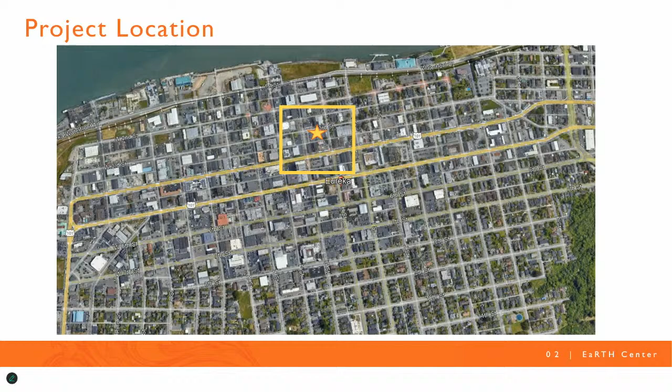Here's a bird's eye view of the project location. Looking closer, the project is located between G and H Streets on the south side of 3rd Street.

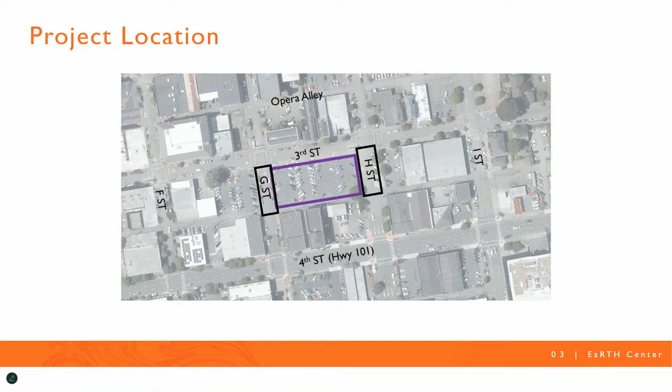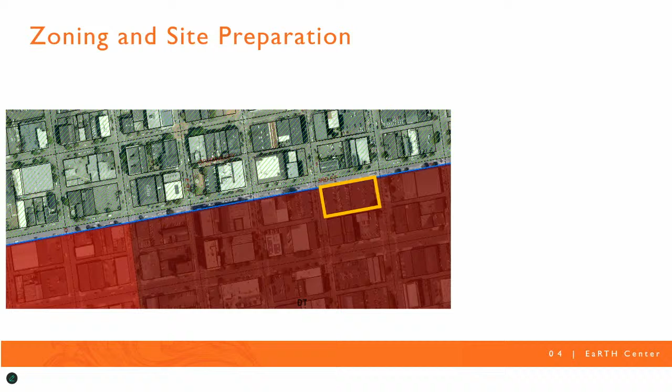The site is located in the downtown, or DT zone, where all the proposed uses, including government facilities, which will be HTA's bottom floor project, residences, restaurants, offices, and retail are all principally permitted. The site is just south of the coastal zone, shown as the hatched green area, and the Old Town National Historic District, and 3 blocks south of the city's northern waterfront on Humboldt Bay.

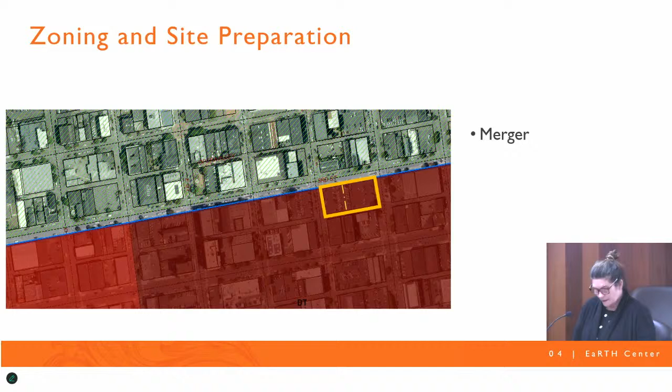The flat rectangular project site is currently 2 parcels used for public parking and is improved with asphalt paving, concrete curbing, limited landscaping planters, and parking meters. The City of Eureka, as the property owner, has completed a merger of the 2 parcels on January 3rd, 2025.

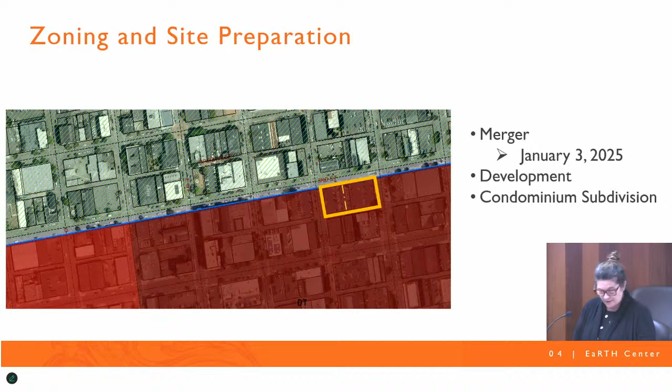Following development, the city will complete a condominium subdivision to separate the ownership of the housing on the upper floors, which will be transferred to Danco, from the ground floor transit center and commercial spaces, which will be transferred to HTA.

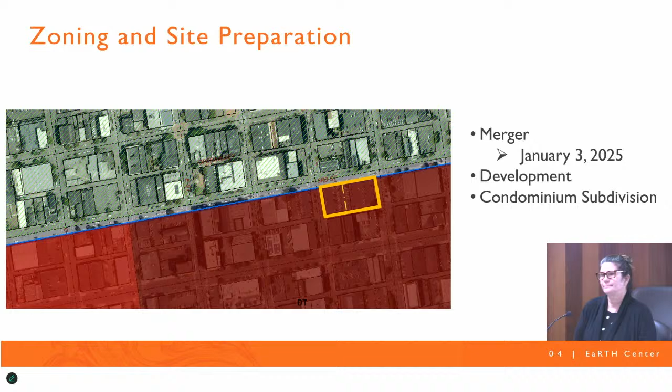On November 16th, 2021, Eureka City Council entered into a Memorandum of Understanding, or MOU, with HTA to collaborate on the development of the EaRTH Center. On February 1st, 2022, Council declared the project site exempt from Surplus Land Act regulations, and on March 1st, 2022, Council authorized the reduction of public parking from the Parking Assessment District.

HTA was awarded a California State Transportation Agency 2022 Transit and Intercity Rail Capital Program grant with up to $10 million for the construction of the ground floor intermodal transit center.

On May 1st, 2024, HTA's board adopted a resolution conditionally approving Danco as the developer for the EaRTH Center project. Finally, on June 4th, 2024, Eureka City Council authorized the city manager to enter into a development and disposition agreement, or DDA, with HTA for the EaRTH Center development, and also found the project categorically and statutorily exempt from the California Environmental Quality Act, or CEQA, by adopting City Council Resolution number 2024-25.

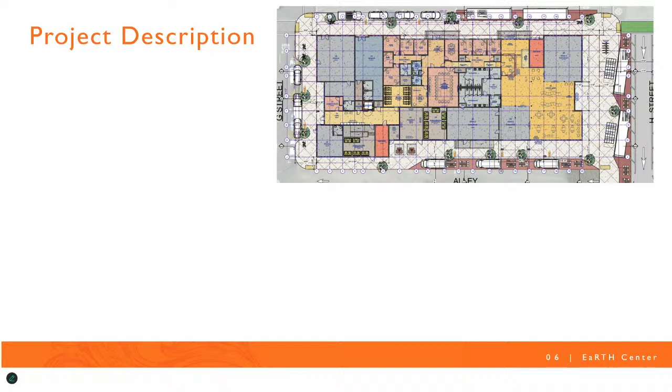The EaRTH Center will be a 4-story mixed-use building having a 19,400 square foot footprint and a total floor area of 75,701 square feet.

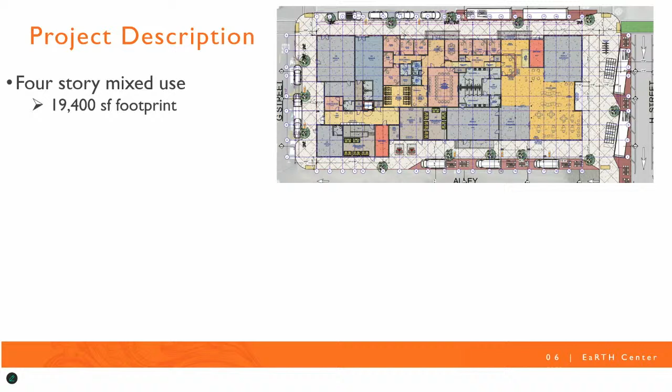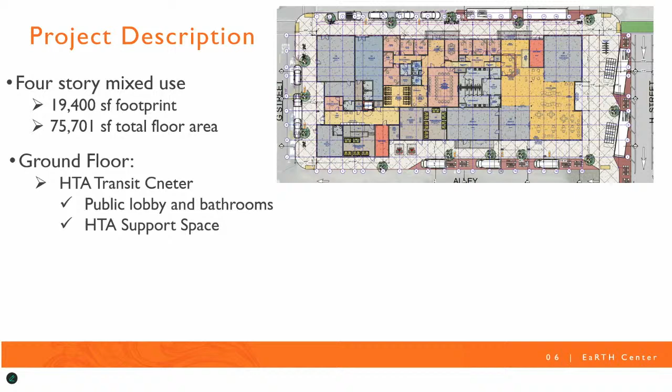The primary ground floor tenant of the EaRTH Center will be HTA Regional Transportation Center, or the Transit Center, which includes a public lobby and bathrooms, offices and support space for HTA, including a conference room, staff lounge, and staff restrooms. There will be 5 leasable tenant spaces.

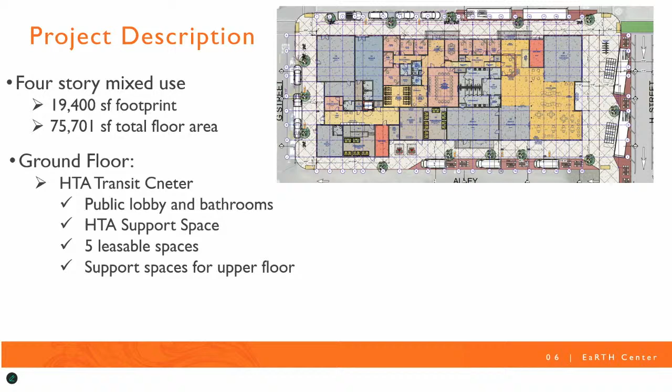That's approximately 11,000 square feet for future commercial uses such as a cafe and retail shops. And finally, ground floor space supporting the upper floor housing, including a lobby with mailboxes, a manager's office, and a bicycle storage room.

The second through fourth floors, and here I'm showing the second floor, will have a total of 46 residential dwelling units consisting of 3 studio apartments, 18 one-bedroom, 13 two-bedroom, and 12 three-bedroom units.

The second floor will contain residential common areas and amenities, including a community room with kitchen, a fitness room, and a 2,613 square foot outdoor terrace with playground.

In addition, each floor will contain laundry facilities, and 2 floors, the third and fourth floor, will contain long-term bicycle storage for the tenants.

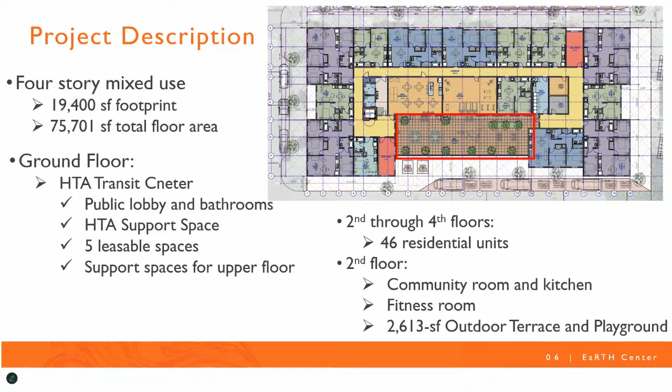The transit center is intended to integrate local and intercity bus service with car share, ride share, bike share, bicycle, and pedestrian travel. To that end, the development will provide various improvements, including expanding sidewalks and new bus shelters along H Street.

New charging stations for buses along the alley, and new electrical vehicle charging stations along G and 3rd Streets.

There will also be a major reconfiguration of H Street between 3rd and 4th Streets. The west lane, where the bus shelter currently is located, will become a bus-only lane. And a new bike lane will run on the eastern side of the street.

The current street parking configuration on the east side of H Street between 3rd Street and the alley will change from angled to parallel, which will cause the street to be reduced to 1 lane in this section. However, on H Street between the alley and 4th Street, there will be no street parking, allowing 2 lanes for vehicle travel.

Under state density bonus law, housing development projects that propose 5 or more units and include affordable housing are allowed to exceed the local jurisdiction's max density limits and deviate from other development standards and zoning code requirements in exchange for below market rate rents.

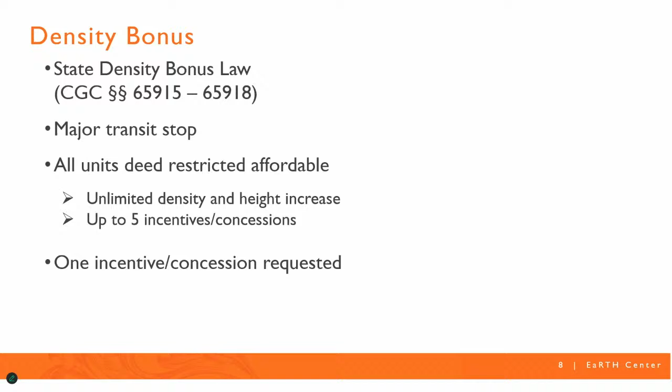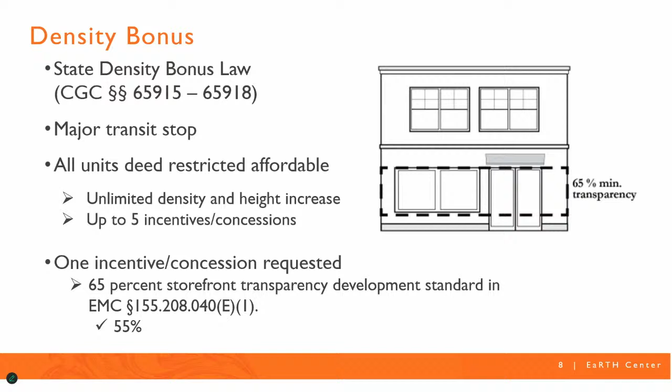The goal of design review is to make sure that the new development meets objective design review standards, particularly for street-facing facades. This helps ensure that the buildings are well articulated and visually interesting, contributing to the overall character of the area in Eureka.

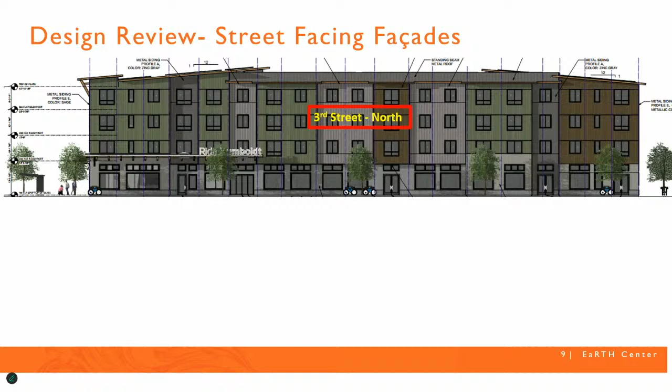Eureka Municipal Code design standards require that new buildings incorporate at least 2 architectural features from a list of 15 features, and that the facades do not have blank wall areas greater than 10 feet by 10 feet square. Tonight we'll be looking at 3 street-facing facades: the first is 3rd Street, then G Street, and finally H Street. The 3 street-facing facades meet the following 3 of the 15 architectural features: roof form variation, horizontal articulation, and cladding materials facade.

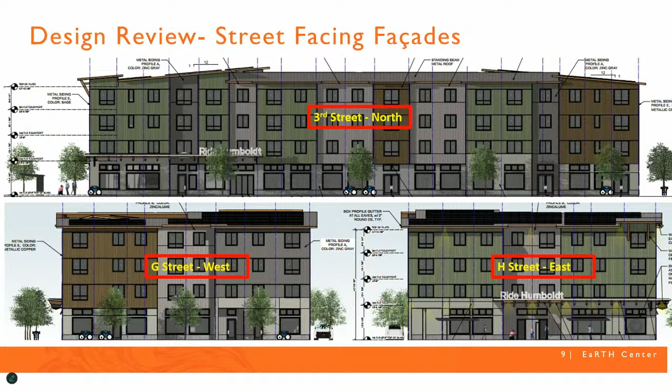Roof form variation: the 3rd Street elevation has 35% roof form variation, the G Street elevation has 29%, and the H Street elevation has 36%, when the standard is 25%. The roof also has wooden eaves, soffits, and roof brackets.

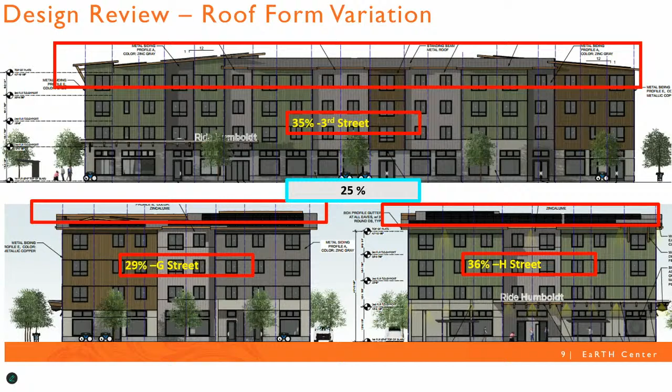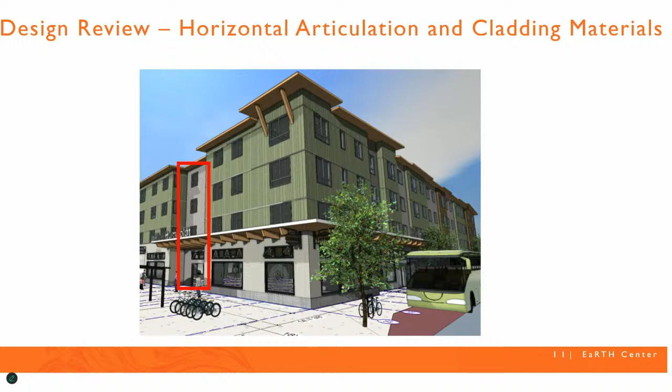The next feature is horizontal articulation and cladding materials facade. The horizontal articulation is easier to see on the side views. This is the northeast corner fronting 3rd and H Streets. There must be a projection or recess of at least 1 foot, and it must be greater than 1 story in height. Here is an example of the horizontal articulation.

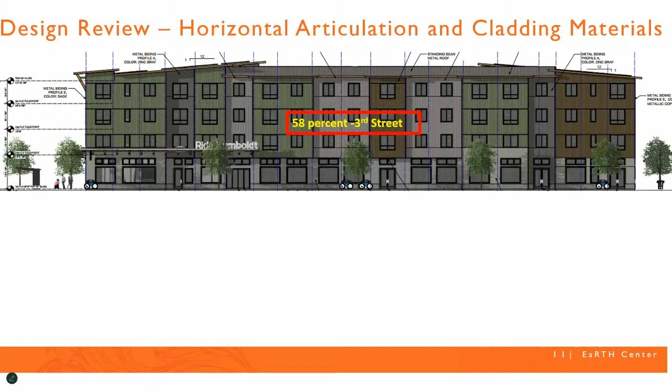The horizontal articulation along 3rd Street is approximately 58%, 36% along H Street, and 35% along G Street, when the standard is 25%. Finally, the 2nd through 4th floors, or over 75% of the building's facade, is clad in high-grade metal, when the standard is 40%. As you can see, the project does not have a blank wall area greater than 10 by 10 square feet.

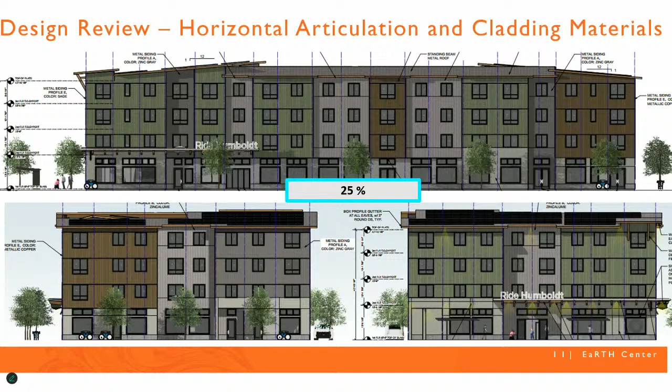Exterior materials: the exterior materials standard in Eureka Municipal Code requires that all exterior materials allow for long-term durability and appearance, and includes a number of standards to ensure high-quality materials.

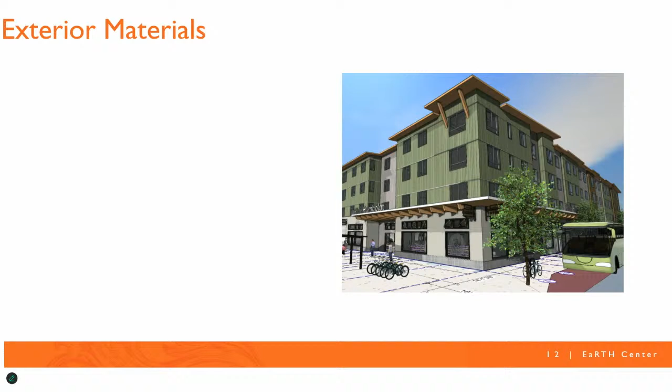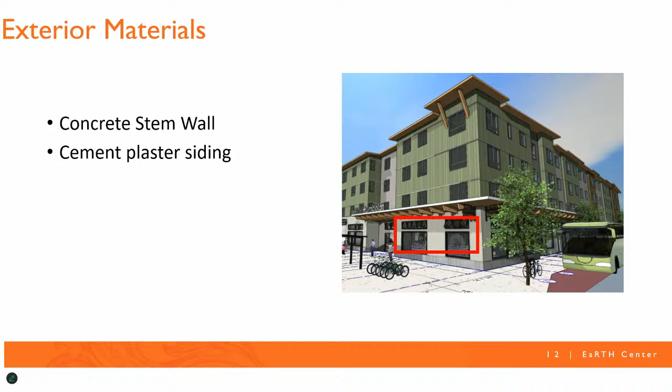The project will utilize 3 materials, including concrete stem walls with decorative finish pattern, shown in those locations, actually all the way around the building; cement plaster siding, which will cover less than 50% of the street-facing building walls on the ground floor; and metal panel siding with factory-applied color coatings applied in a variety of panel profiles for the 2nd through 4th floors.

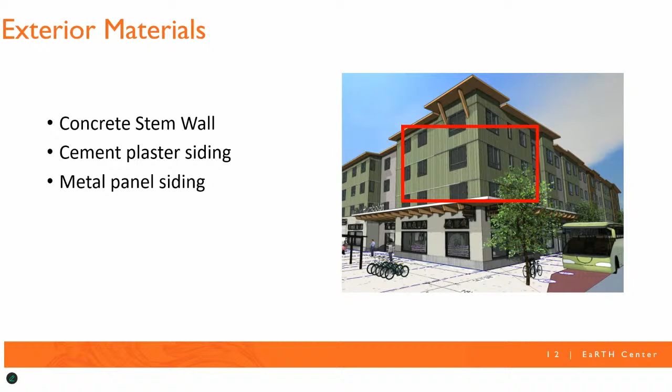Based on the analysis in the staff report, the EaRTH Center development qualifies for the requested density bonus, will not be detrimental to public health, safety, or welfare, and complies with all applicable design review criteria. Therefore, the recommendation is to hold a public hearing and adopt a resolution conditionally approving the density bonus and design review. Staff has prepared a suggested motion, but will stop screen sharing to allow for discussion. Staff, as well as Danco and HTA, are available for questions.

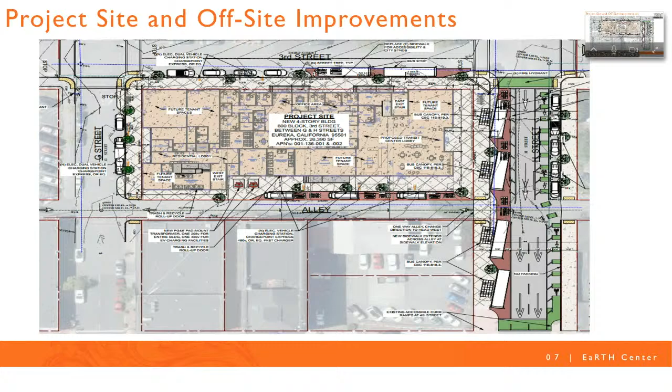Okay, let's stick with questions for staff, and then we can bring HTA up here shortly. Go ahead, Chuck, I have a question.

It's a design question. When this project first came before our group about a year ago for pre-approval, the architectural design was considerably different than what we're looking at here. I'm wondering if somebody could talk a little bit about why it's so different than the original architecture we saw, which was much more compatible with the community.

It's my understanding that it was a different developer architect that worked on that. When Lisa went over the background slide, the city was in agreement with another consultant with the school, I believe with Cal Poly Humboldt, and then that MOU fell through. That's when Danco stepped up and HTA selected them, but Servitas or something was the previous one. Yes, so they backed out and Danco moved forward with different architects.

What you're saying is that there was no option to carry that architectural style forward with the new developer? There was no requirement by the city council or HTA to retain that original design.

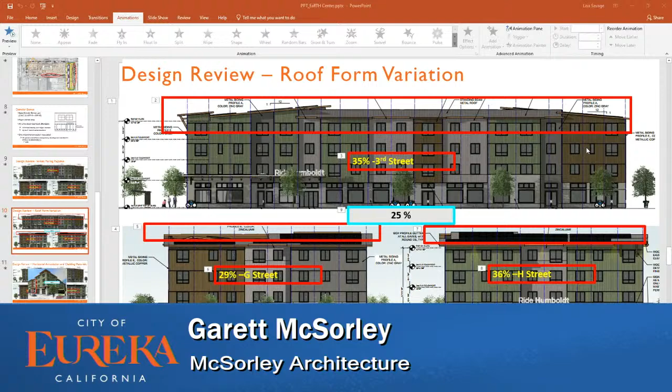I think it's actually really interesting, and it'll be really nice. It provides a varied scale. The green metal siding, the copper metal siding, the width of the panel profile varies between like 6-inch wide, then a 2-inch gap, a 2-inch rib, a 2-inch gap, and then a 4-inch rib. So there's a staggered pattern that creates a little bit of variation, even though overall the wall is just metal siding.

It's metal siding with a lot of different character and scale associated with it. You can see there's sections with the gray siding that have a consistent metal panel width, and then it changes up and becomes a little bit more interesting. So the elevation drawings may seem flat, may seem like there's not a lot going on, but I think in the real world, when it's built, it'll be evident that there's actually a lot of thought and care to create a sense of scale.

That's one of the things we like about brick, is it has a human scale. It's scaled to the human hand. I think this metal siding application does a similar thing, where it actually breaks down the building and makes it really interesting and creates a shadow.

The roof line maybe looks boring from a flat elevation, but in reality it's much more varied than you'd expect on a building of this size, where a typical building would have a parapet - exterior walls going straight up, a cap, and a flat roof. Here we have a pitched roof with standing seam metal roof and eaves that overhang at least 3 feet on all sides. Those eaves create a shadow line, and the underside is finished with clear finished wood, which matches the diagonal brackets and timber frame awnings around the base of the building.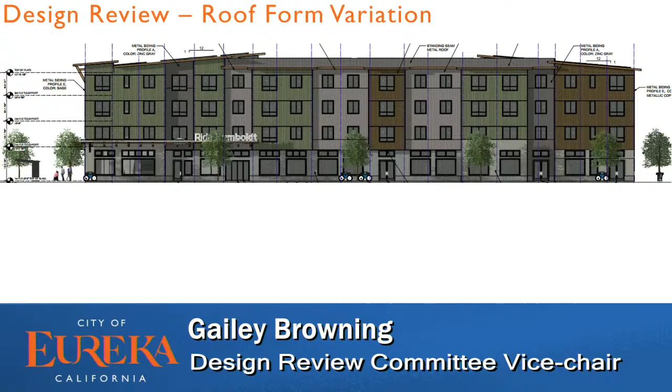Question for you: what if you were to pitch those just 10% higher? That would increase the height of the building on 3rd Street - every foot taller the building is could add more shade to 3rd Street and the buildings across from the project. So even though we could make this building 100 feet tall, we're trying to keep it low in profile in order to not shade the street.

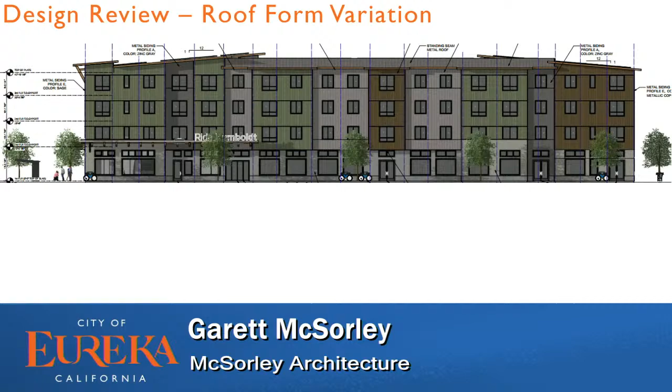Can we go to the perspective view of this? I think that might be helpful, to just get a better feel of the human scale and the perspective from being down on the street and being able to look up to the roof lines there. Thank you.

The concrete base is an example of something that works well, where it provides some structural benefit, because the structural shear walls can land on a nice strong concrete stem wall, and it reduces the height of the wood shear walls. But then it also provides this aesthetic benefit, because you have this nice, clean, heavy, strong base that creates an effect on the building.

With the form boards, we can actually use different patterns. So the concrete base itself could effectively be a brick pattern. We probably wouldn't use an actual brick texture - it'd be something a little different, but it could have a pattern within it, and that's what's included in the staff report. In the elevations, you can actually see some variation in the texture of the concrete base.

It's not just applied, like just putting brick on it. It's actually using the integral part of the building, the structure of the building itself, and using that to the aesthetic benefit of the overall project.

The stucco cement plaster base would also have control lines in specific locations. This elevation drawing, you can see there's a shadow line near where there would be control joints. And it also provides the opportunity in the future for signage and murals or any other things that could happen as the building progresses into the future.

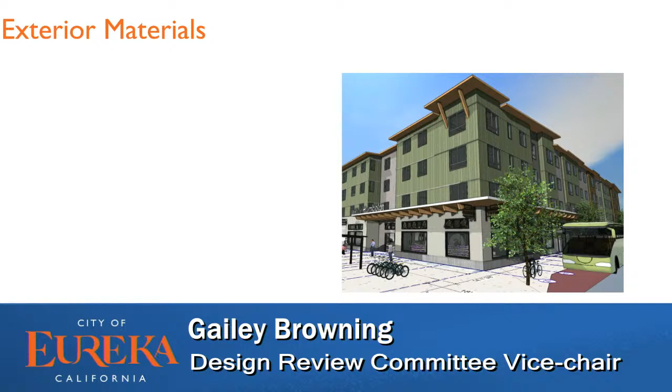Yeah, that would work. Garett, you had mentioned wood, that's just under the eaves, not at the top underneath the soffit panels. Just underneath, on the bottoms of the roof overhangs and the bottom of the awning overhang. So we get some of that natural wood, but it's in a location where it's protected from weather, and it'll look good into the future.

Yeah, please go ahead. I have a question. I'm not familiar with the material, but I see it being installed over at the Habit Burger going up on the corner of 5th and T. The panels they're installing have a brick facade on them that appears to be made from foam, and actually looks like brick. It's about as nice a simulation of brick as I've ever seen for an imitation product. If you haven't seen it, I'd suggest you go look at how that's going together, because it incorporates banding of brick, and it's not brick. When you talk about brick being a budget buster, the people who designed that building understood that and figured a way to put it into the design without breaking the budget.

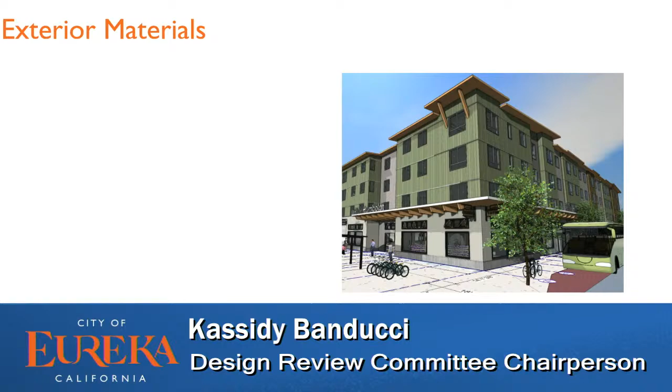I'm gonna throw out an idea, because overall I don't think what's being presented here is outside the bounds of the review. We have some wood elements in the canopy—I'm curious if maybe they could have a faux metal wood panel aesthetic, like I've seen on many public buildings before. I'm wondering if drawing that wood from the canopies down into the facade in some locations, Garett, maybe at the primary entry or something, could bring some of that warmth down to the human scale and tie those architectural elements together, so it's not just the perception of a complete metal facade at floors 2 through 4.

So maybe like where it says Ride Humboldt on the east elevation, in that recessed area, or some of those other recessed areas—just trying to pull some of those other building materials in. I know that Old Town is historically Victorian, and wood is a highly used application in our community, so I'm just trying to think about how we might pay tribute to that as well in this facade and the overall design.

As a suggestion, I don't know how the committee feels about that, but I really do appreciate the sloped roofs. As Garett alluded to, a lot of times with these taller structures we just see flat roofs, and we're in an area of high rain and moisture, so it's good to see canopies at the pedestrian level, and to continue seeing that even at the upper levels. Those are a few comments and suggestions there.